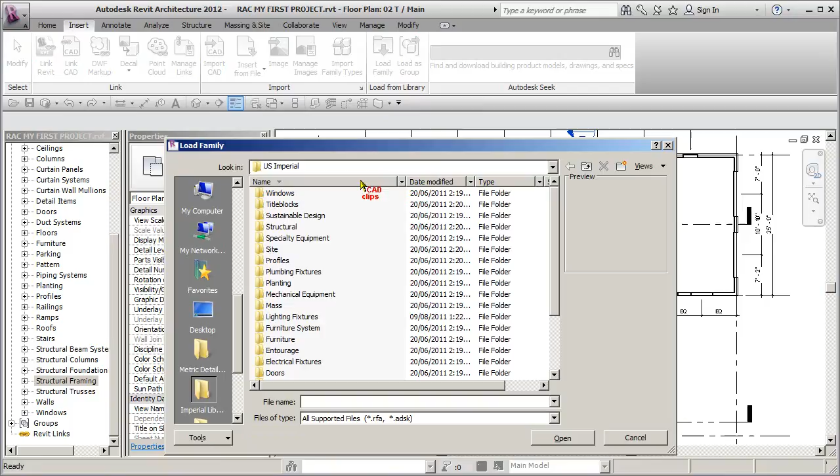Load family. Search, sort by alphabetical, invert that, double click on structural, then we go to framing, and then we go to wood, and we want a glulam western species, I suppose. Looks good. I think that's the only one. It's going to ask us for some sizes. So this is a type library, which is a TXT file which accompanies that family, and it's really easy to make these on your own.

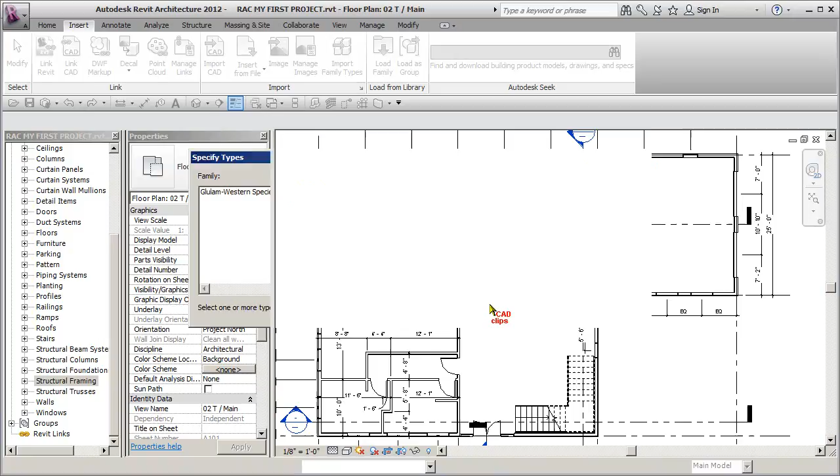When you have lots of different types, instead of loading all the types, you can hand pick them, and it is extremely easy to create your own table externally. It's going to be a flush beam, so we don't care about the width. The engineer is going to size that, but let's go to a 5.125 by 13 and a half, because that will get tucked up in there. Okay, so that works good, and we hit OK. So now that beam is loaded under structural framing.

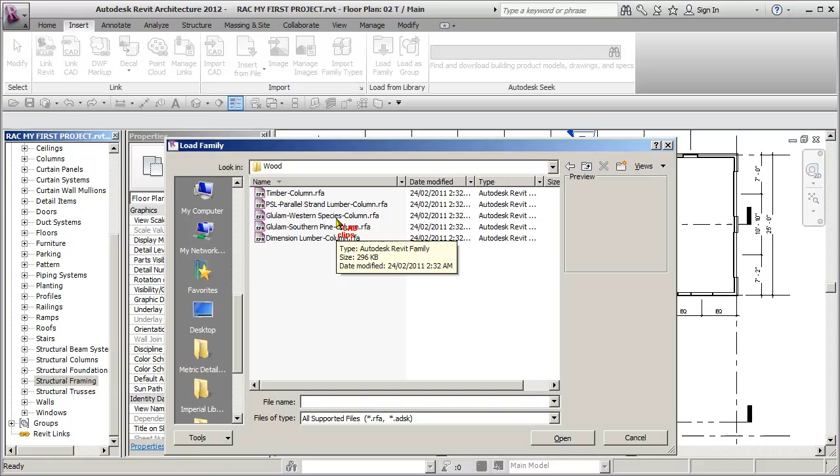Okay, what else do we need? We need some columns. So let's go load family, back to structural, columns, wood, glulam western species again, and the core of our walls is 4 inches, so we can't go more than 4. What do we have there? We have a 3.125 by 27. Hit OK, and if we need a bigger column, we could have also changed the size of these walls. So now under columns, we have a new column. You can pick or size whatever you want, framing wise.

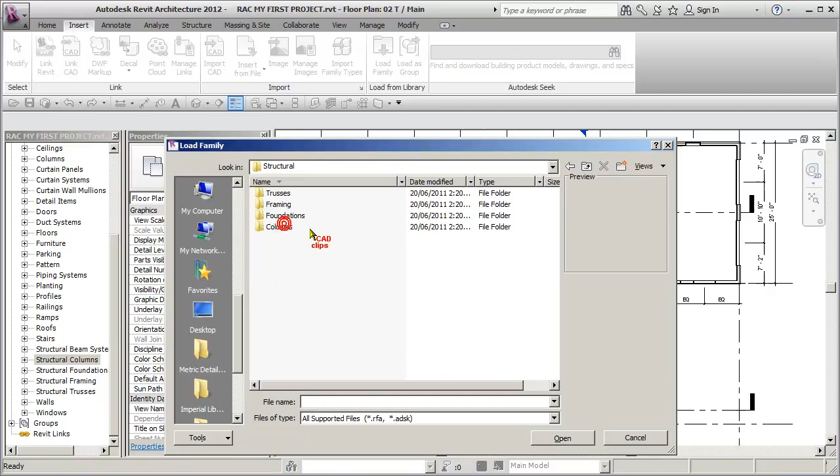So those are good, and then we're also going to need some concrete columns for the piers underneath. So we might as well do that as well. Load family, structural, columns, concrete square. Hit OK. And that one comes in with a 12 by 12, 18, 24, and 30, and you can create your own as well. So that is all I need for now. So I'm going to say OK.

So now I'm going to go to my structural tab, and I'm going to draw a beam. I'm going to pick here. There it is, my 5.125 by 13.5. Looks good. Now, where is it going to go? Well, I'm drawing it here. I'm on the main floor. So by default, it's going to place it on the main floor.

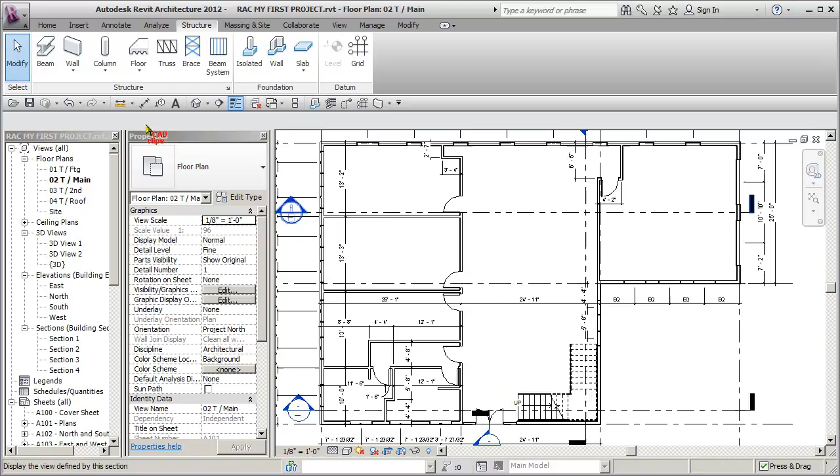Okay, and it says here, oh, click in here. Let's try that again. Beam. As I draw it, it says top of second floor. I think because I might have been playing around with it beforehand. So what we need is for it to be top of second floor minus 3/4 of an inch. Let's hit escape and stop this for a second.

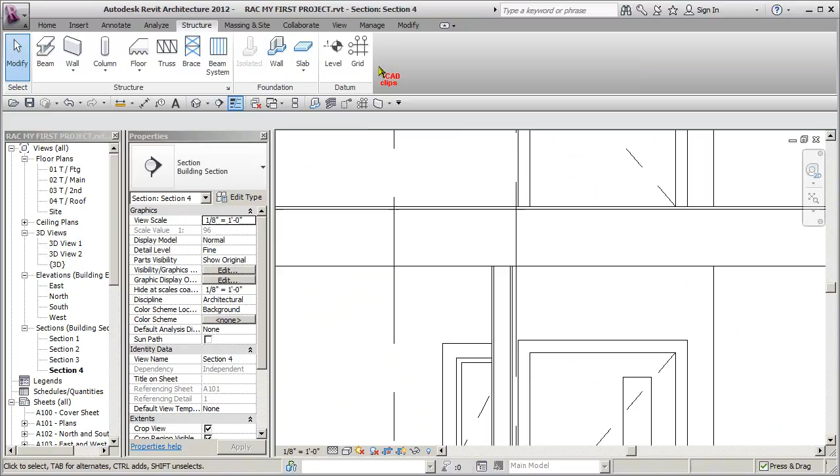Let's go have a look at our cross section here. We're about to draw a flush beam right inside of here. There's our top of second floor, and there's where our beam's going to go, right inside of this space. And then we're going to have another one over here, and that must be going through a door. Yeah, we're seeing some framing. So there's the two beams we're about to draw.

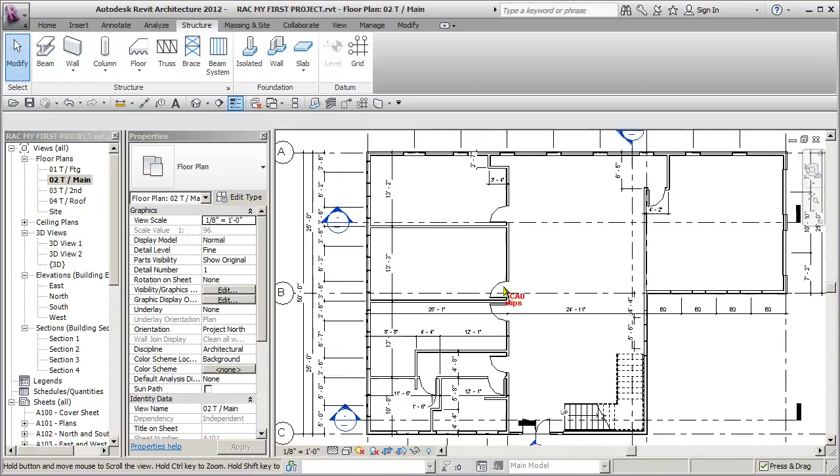It's easiest to draw it from the main floor, but it's not going to be on the main floor. It's going to be above the main floor, right? So here we go. Beam, pick your type, and then we're going to say, no, it's not the top of main, it's top of second. You can't set an elevation. Extension here is a lateral extension, not a vertical extension. So I'm not sure why, but you cannot set the offset till after the fact.

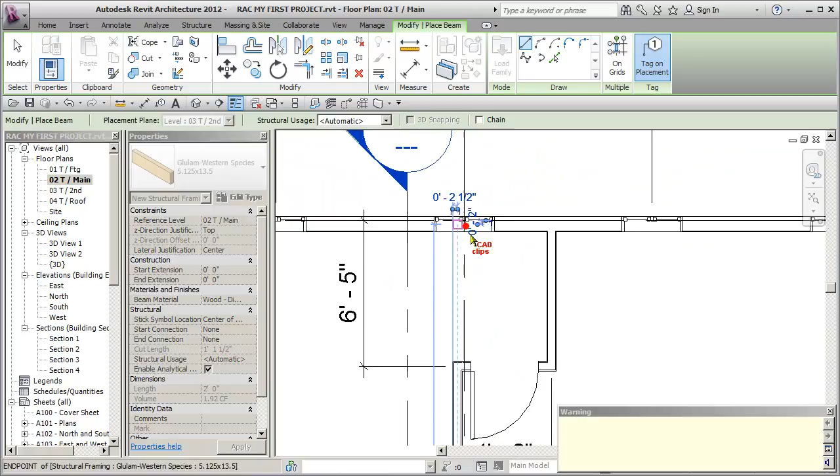So watch what we're going to do. It's going to go up above me, so I'm also going to get a warning saying I can't see what I've just drawn. I want to go right down the center of this wall. And we'll need a header over this window. Click. There's my beam. None of the created elements are visible in this view. That's fine. Hit escape, escape. We can ignore that warning, and we're going to do it again.

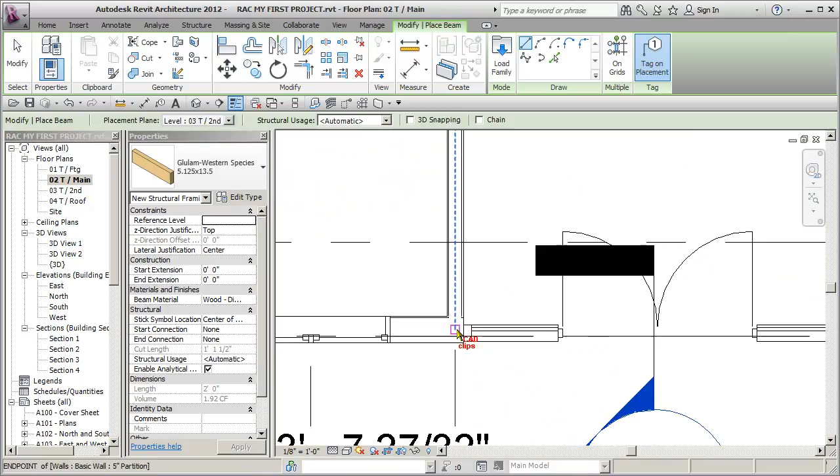Zoom in over here. We're going to go beam. Save project, sure. I'm going to pick my beam type, set it up at the second floor level, hover in here, snap to the center of that wall, zoom out, nice and straight. I'm going to need another header above that window. The same warning, who cares. Escape, escape.

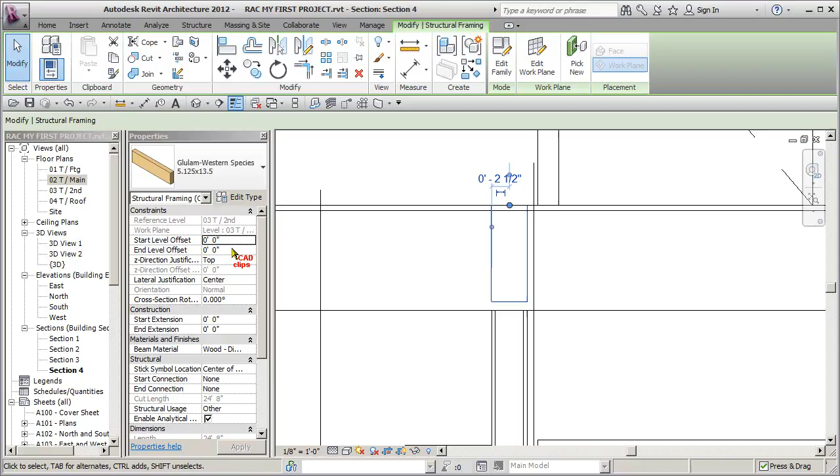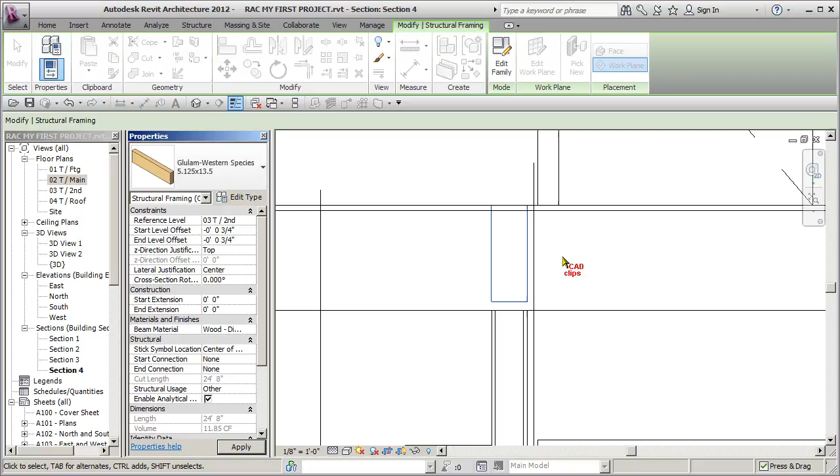And now I double click on my section and I zoom in, and there's the beam I just drew. So that beam's okay, but the problem is I need to set this offset. Minus 0.75 inches. And I'm going to go Control C because you can slope it by offsetting either end. So Control C and then Control V. Boom. Now that beam is down inside of there.

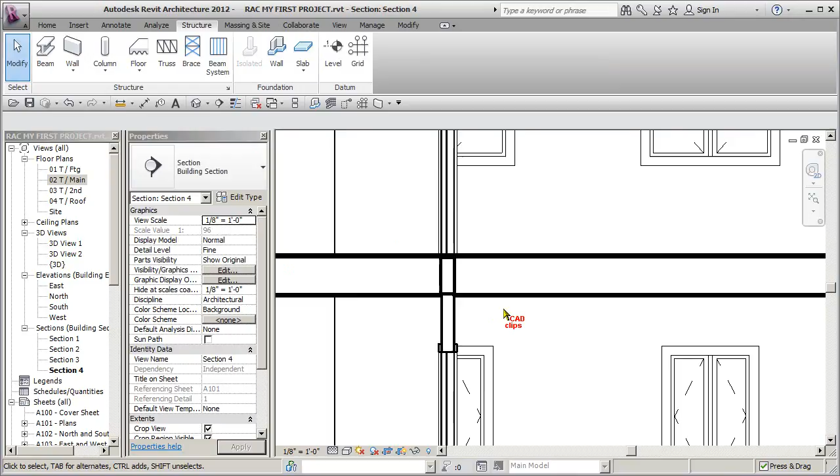I've got my thin lines on. If I do TL, you'll see thick lines there. So there's my beam, and then this one's the same thing. Going to go into here and change this, Control V minus 0.75, Control V minus 0.75, and my beam moves down. There's my two beams. So let's go have a look at that in 3D.

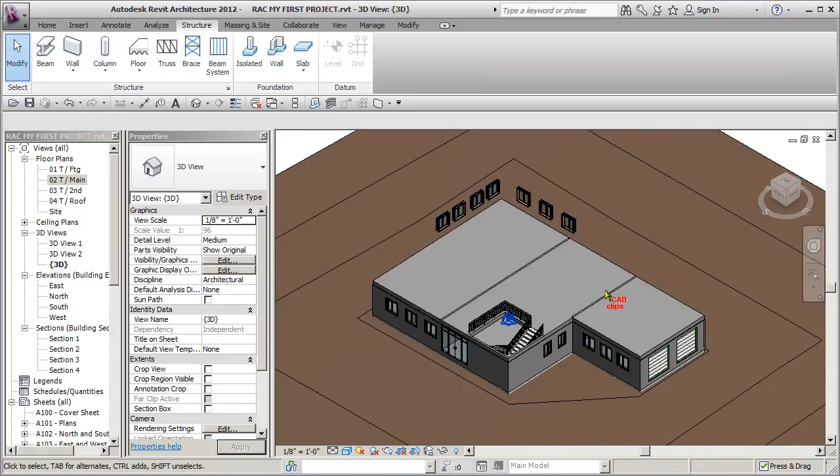Shift middle mouse button, grab this, hide the element. Let's hide all this stuff. We're learning here. Let's hide the elements. And in fact, if I just click on it, my floor goes transparent, and there's my beam. Now we're going to add in some posts. We'll put another beam underneath. That's it for now.